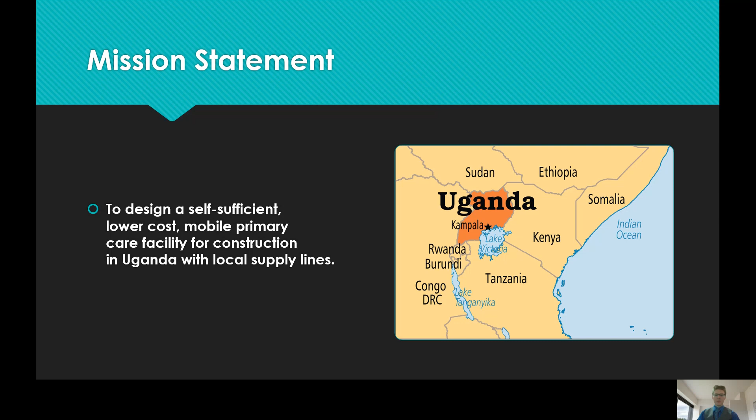Our mission statement was to design a self-sufficient, lower-cost mobile primary care facility for construction in Uganda with local supply lines. To break that down: it needs to be self-sufficient, meaning it doesn't need outside resources unavailable in the village. It needs to be lower cost than current solutions. It needs to be somewhat mobile, able to be taken in and out of the village as necessary. And it needs to be constructed in Uganda using local supply lines to support the local economy.

The reason we took on this project is that in Uganda, 70% of doctors practice in the urban region where only 20% of the population lives. That leaves only one doctor for every 22,000 people in rural areas. This means long travel distances in rural areas discourage patients from seeking professional care. Two of the primary health concerns in Uganda are diabetes and hypertension.

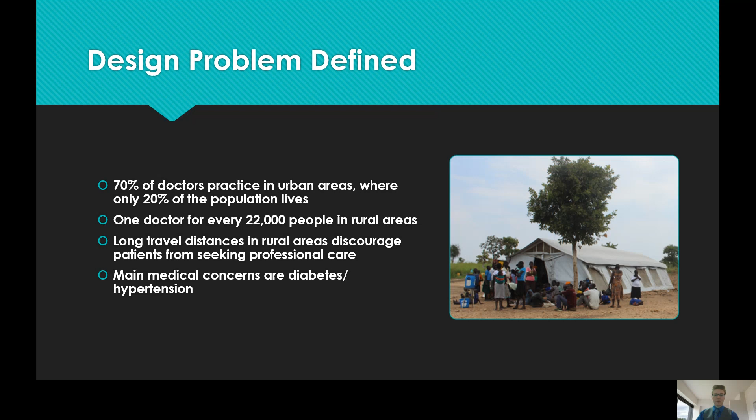The political climate can change rapidly, so a clinic that can be moved is ideal. Some problems we ran into: the country is landlocked, which makes shipping very expensive from America or Europe. It gets heavy rains, around 50 inches a year. The roads are narrow and unpaved in rural areas. There's lots of dirt and dust, which turns to mud during the rain. And it's very hot, averaging 77 degrees.

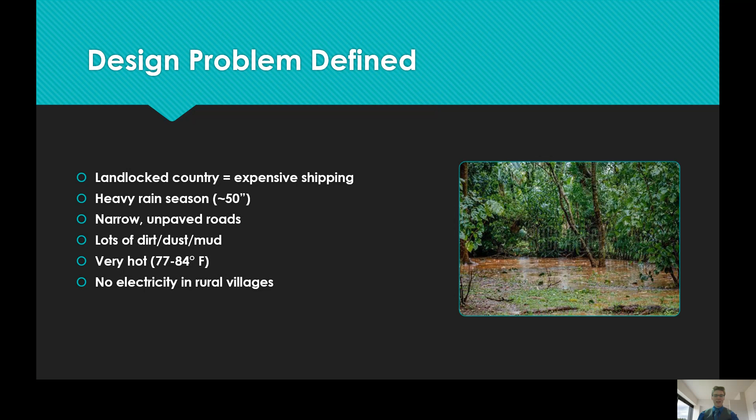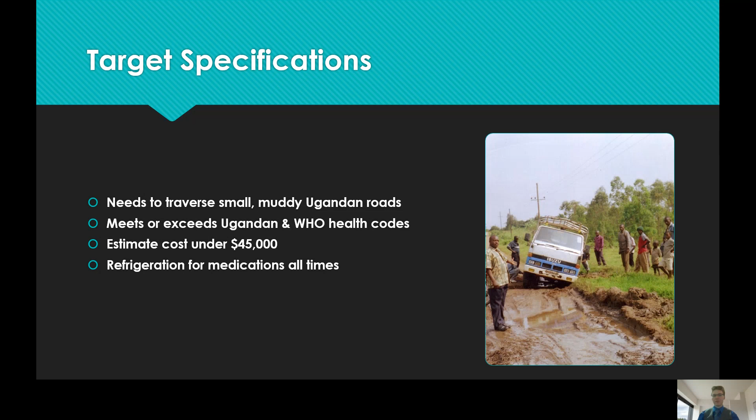There's no electricity in the rural villages. Some of the specifications our clinic must meet: it needs to traverse the small, muddy Ugandan roads. It needs to meet or exceed Ugandan and World Health Organization health codes. It needs to cost less than $45,000, and it has to have refrigeration at all times for medications.

It should be infection control compliant, which primarily means non-porous surfaces. It should be self-sufficient in terms of energy. It needs to be ventilated, which the WHO defines as 160 liters per second per patient. It would also be ideal if it has UV light to constantly disinfect all surfaces. It should ideally have filtered air and positive pressure. All equipment should be locally sourced or use local supply lines. There are a lot more requirements, but these are the most important we'll share.

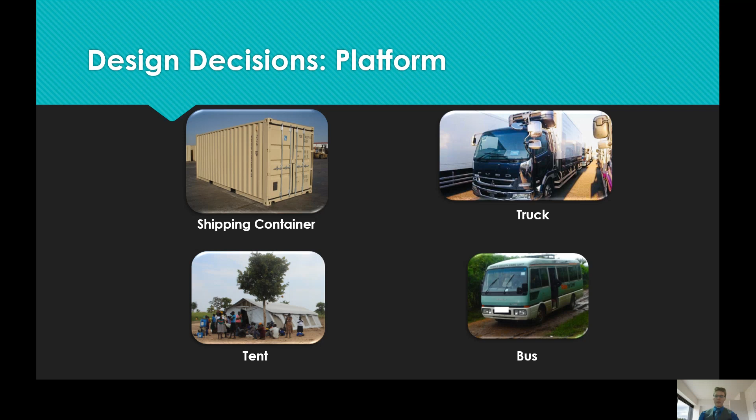If the clinic is going to be mobile, it needs to be on some sort of platform. So we considered putting it in a shipping container, a truck, a tent, or a bus.

We used a decision matrix to decide which platform to use, so it wasn't just an arbitrary decision. On the left are the criteria or constraints: it needs to be mobile, it needs to have space, it needs to not be too expensive, it needs to be very durable, it needs to be secure, and it needs to have staff.

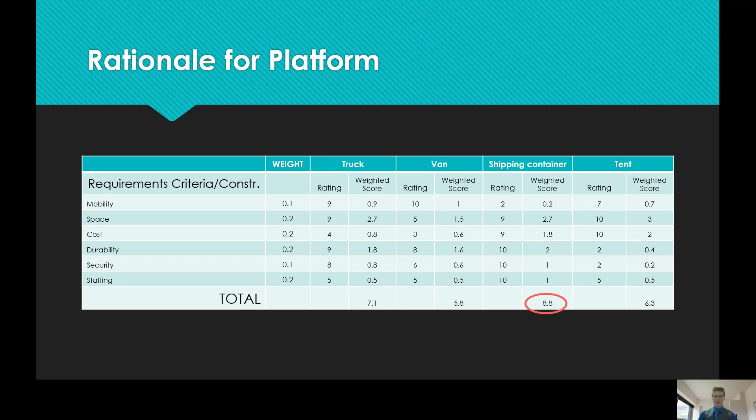What we mean by staff is that in the villages there's a village healthcare worker, but if you want something mobile traveling every single day, you'd have to provide staff for that. We weighted each criterion, ranked each option, then multiplied the rating times the weight to get a weighted score. When tallied, the number shows how good each option is based on all these constraints. The shipping container, based on these criteria, is the best option.

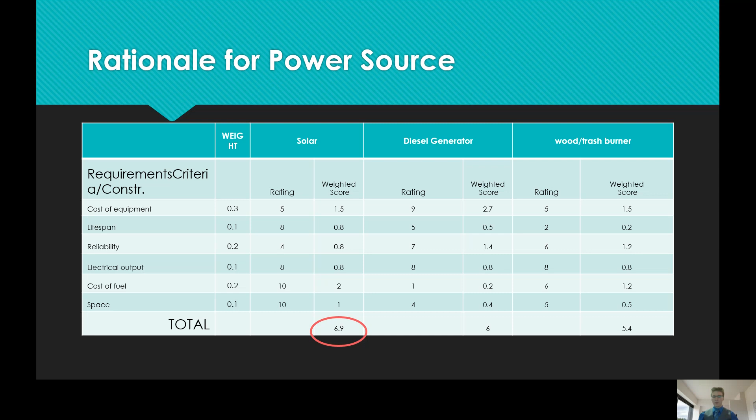The next decision was what power source to use: solar, a diesel generator, or a wood burner. We used another decision matrix. Here the important things are cost, lifespan, reliability, electrical output, cost of fuel, and how much space it takes up. We weighted them, ranked them, and got a weighted score. Diesel generator and solar came very close, and we even considered doing both, but we decided to go with solar.

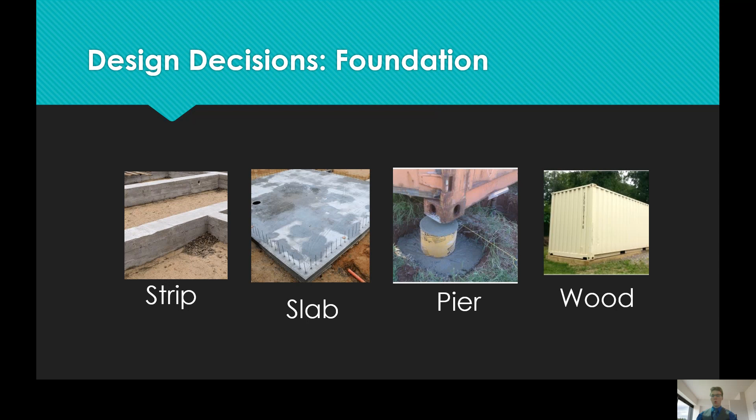Using a shipping container, it needs some sort of foundation. Options were a strip concrete foundation, a concrete slab, a concrete pier, or using wood. We made another rationale decision matrix, where cost, ease of construction, durability, and security were the most important features, with cost being the driving factor. Wood, gravel, and pier scored pretty similarly, but we decided to go with a pier because it's more secure and will last longer.

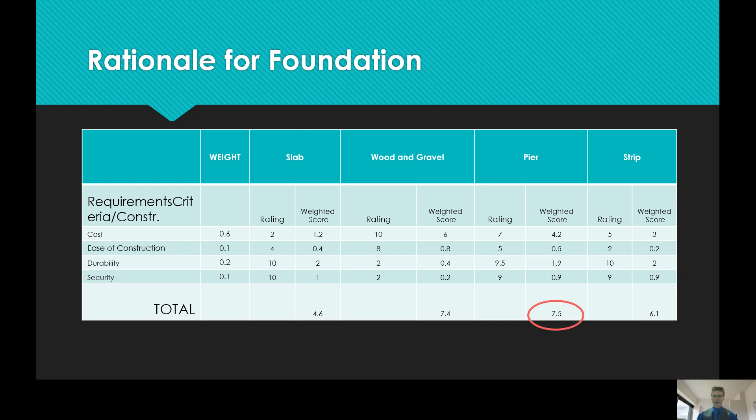So next, we're going to get into the actual design of the clinic. And the clinic needs to be solar powered.

So we made these panels, which are made out of welded steel, and they'll fold out. The reasons for that are primarily to allow more space to attach solar panels, but it will also provide shade for patients waiting to be seen.

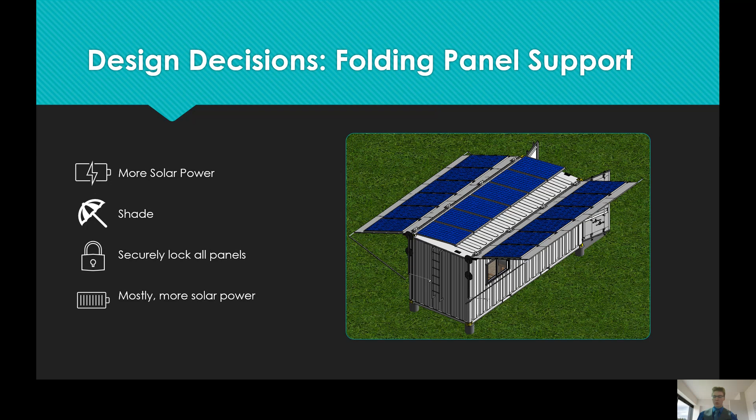When they fold in, the clinic can still be moved, so it won't adjust the mobility, but it adds security, because when the panels are folded, they can get locked shut, and that will keep them from getting damaged or stolen while the clinic is not being used or during a storm.

So some more overall design: it can be relocated with a truck, so it meets the mobility needs.

It has 18 solar panels, 3 12-volt LiFePO4 batteries, and a power inverter. It's insulated using closed cell spray foam and has a pier foundation, as you can see in the SolidWorks image here.

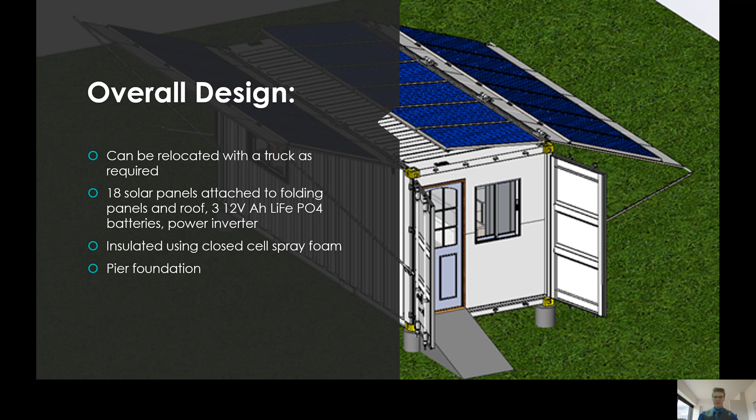So you can see the floor layout in this image. The medical equipment that's involved is an exam table, an electrocardiograph machine, an oxygen concentrator, an autoclave, an ophthalmoscope, an otoscope, and a procedure light.

This is the minimum that we found would be necessary for a regular operating clinic for regular checkups and procedures, but this could be adjusted to be more or less depending on the needs of the specific village or location where this was implemented. And you can see the UV lights are the blue on the wall there.

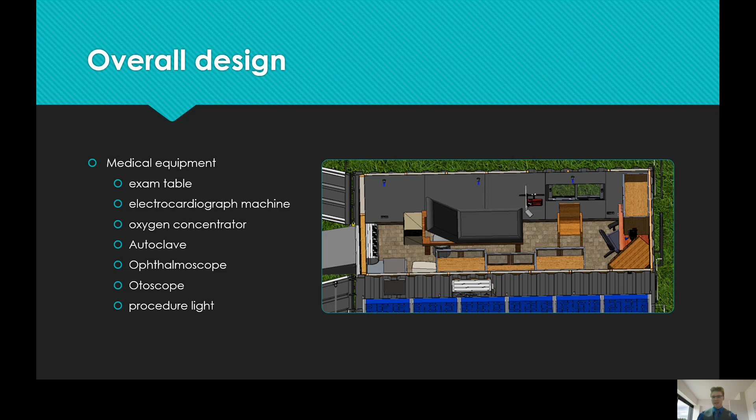So then this is the other side of the clinic. It has a sink there with a 70-gallon water tank, which would allow the healthcare worker to wash their hands 70 times, because it takes about a gallon of water, which is very important that they be able to do that between every patient and even more often.

It has a 12-volt DC pump, a water filter, and hose connections so that the drain water can be taken away from the clinic a significant amount and drained safely. And then it also has a connection to the outside where the tank can be filled up with either a hose or with watering cans.

There's also, as you can see, lots of storage space and a fridge and cabinets.

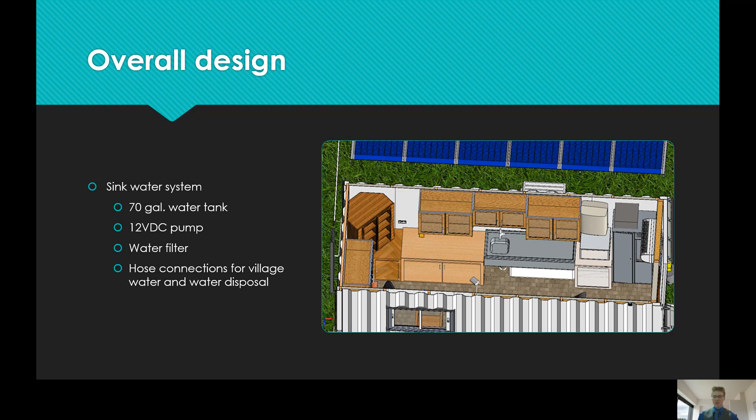So the design has a ventilation system and an air conditioning unit. The AC unit would be on a microcontroller that, if the batteries got below 50% or whatever the operator decided, which could be programmed, then the AC would shut off. That way it doesn't consume too much power.

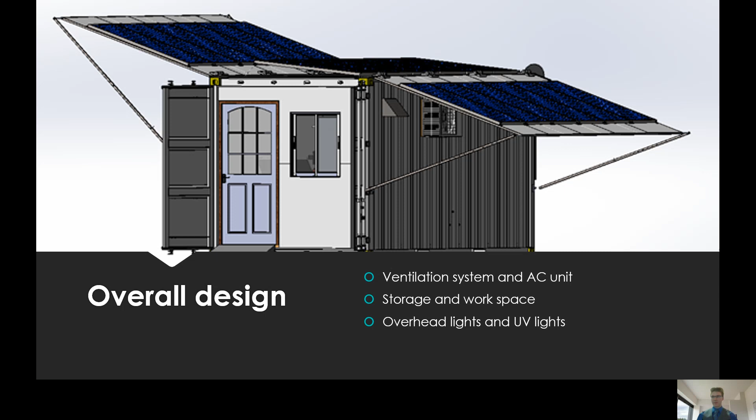And for a really low cost clinic, the AC could be removed altogether. It has lots of storage and workspace and a free-flowing floor layout. It has overhead lights and UV lights.

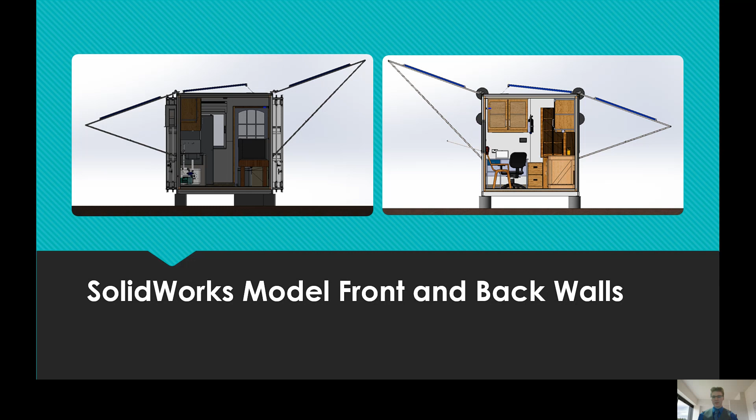So here's a picture from the outside, and here you can see what the front and back look like. So there's a fire extinguisher and lots of safety features.

So then I'm going to breeze over the engineering analysis, but if you want to, you can pause the video and then analyze each of these slides.

Basically, we were concerned that as wind blew on these panels, the stresses in these poles would be too great. So we analyzed both the pin and the pole for buckling as well as stress.

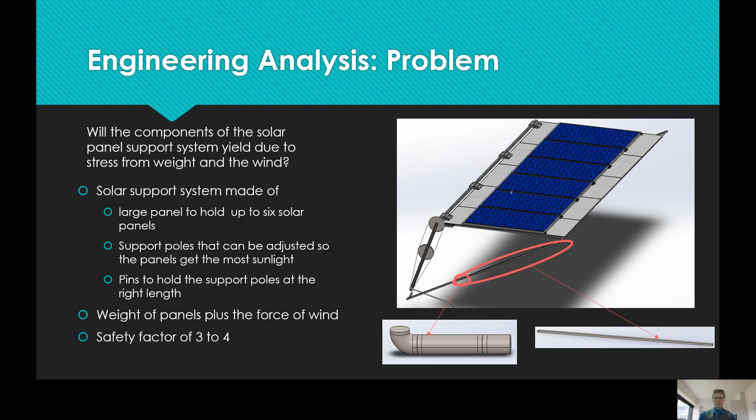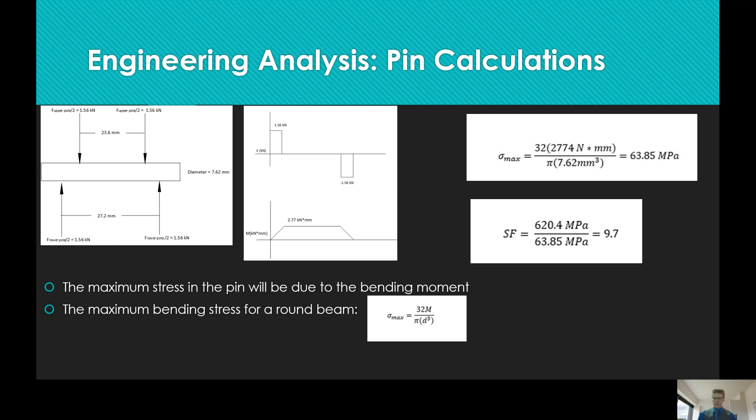So here's the equations that we used, our assumptions, our free body diagram, and more equations. So here's the shear and moment diagrams.

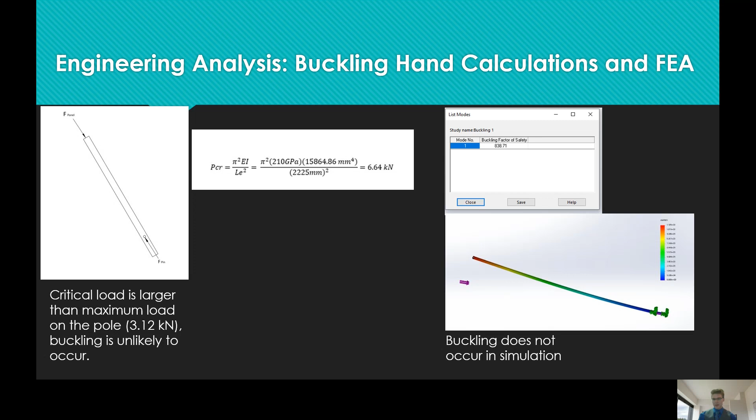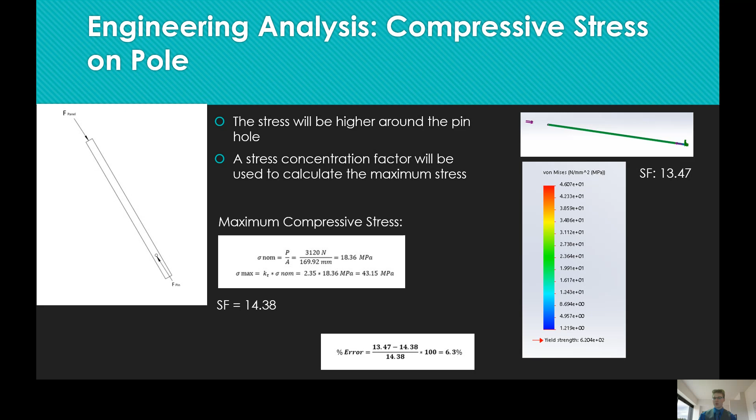Our finite element analysis on the pin and those results, the conclusion from all of this is that the safety factors were high and the difference between hand calculations and computer simulations was small. So we are very sure that the clinic is not going to break.

These will last. So now for the design for manufacturing rationale, we assume that the cost of products in Uganda is going to be similar but a little bit cheaper than US costs, that power tools and a portable welder will be accessible in Kampala or whatever city this would be built in.

And we assume that this would be small scale production, so casting or automated production lines and other large scale production methods will be unnecessary.

Parts will be bought from local supply lines and fabricated to tolerance, and then welded to make assemblies. So we're assuming that power tools, a welder, grinder, that sort of thing, but nothing more complicated than that, no machining or anything like that.

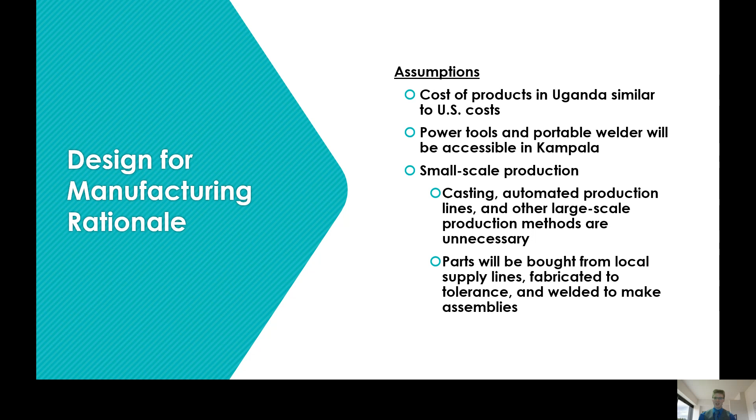So now for the economic analysis, the lowest current price for a product on the market that's similar is Clinic in a Can, and it costs $45,000 to purchase in the United States, and then there's an additional $20,000 in shipping to get it to Uganda.

So to build a clinic in Kampala, we estimate that the cost of materials will be about $40,705, and the cost of labor will be about $2,295, which brings the total manufacturing cost to $43,000.

So the design is structural, it does meet the criteria, and based on our estimates, it is financially feasible.

What we recommend is that someone, perhaps myself or one of our partners in Uganda, takes our bill of materials and finds the actual cost of all those materials in Uganda.

Assuming the project is still financially feasible, then a team of volunteers should go over, and that would include myself and probably others either from this Capstone 1 team or other volunteers, should go over and build a prototype.

That prototype should be brought into a village and used for 6 months or so, and then the design should be updated based on what we find out from actually using it in the field.

Assuming things are still looking up and more villages want this, then we should begin production to produce as many of these as possible.